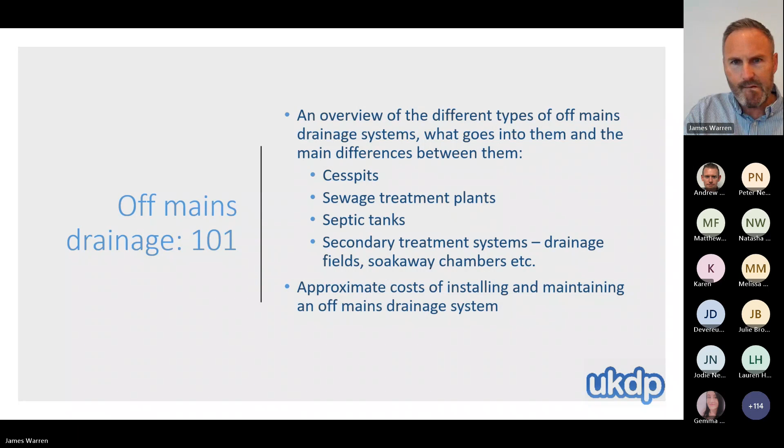Now, if the cesspit is sized appropriately for the property it serves, it should need emptying between 6 and 8 times a year. Now, if this is an old-fashioned, say 40 years plus old system, it will be built of brick or block work, and the customer will only know it needs emptying when something quite dramatic happens, such as the property's facilities start to work a little bit slower than usual, or there might be some nasty odours coming out, or indeed it might be overspilling in the garden.

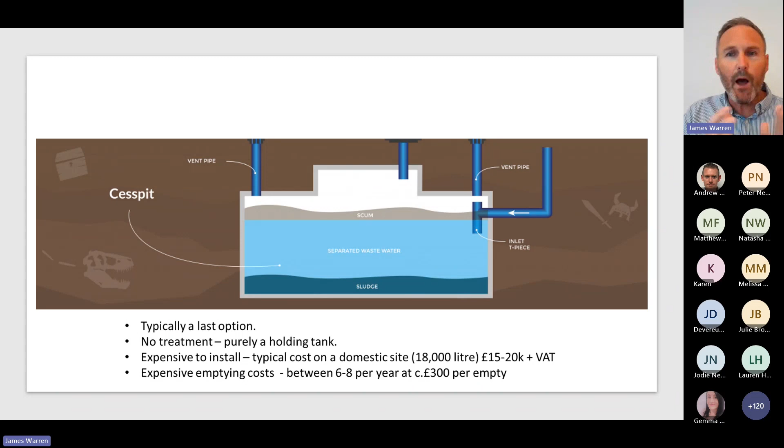And what I mean by that is the dense waste will naturally fall to the bottom, and it's referred to as a sludge layer. I don't know why it's called that, but it's pretty gross, but that is what it's called. And on the flip side of that, the fat, oil and grease and any matter that floats will go to the top, and that will form a scum layer. And what we have in the middle is effectively just the separated dirty water, but that has also got a label, and no one will ever drink again after this because it's called clarified liquor. I know, I don't know why, but that's what it's called.

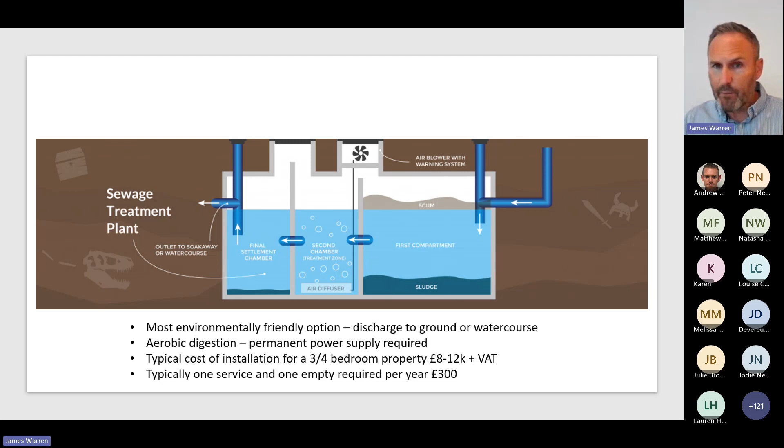But still, the absolute majority of off-mains drainage systems in the UK will still be septic tanks. I'm going to spend just a little bit of time on them, if I may, purely because the majority of what we'll see during our transactions or the building surveyors see on site will still be septic tanks. Originally built of brick and block, and from the 60s onwards, it's glass reinforced plastic, like a fiberglass material. But I'm going to talk you through the different types, if I may.

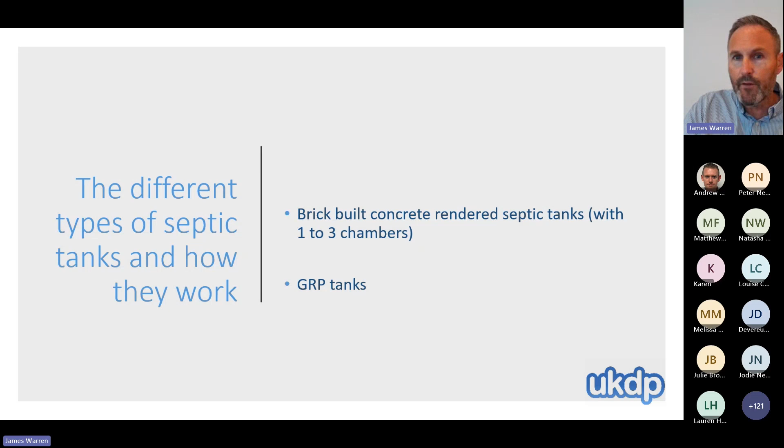Now, without being too boring, and I'm probably already guilty of that, for which I apologise, any manhole should be a dimension of 450 by 600 mil, and the 600 mil being the length should dictate the direction of the pipework within that manhole. So if you're looking at the length of a manhole, when you lift the cover, that should be the direction the pipe is going.

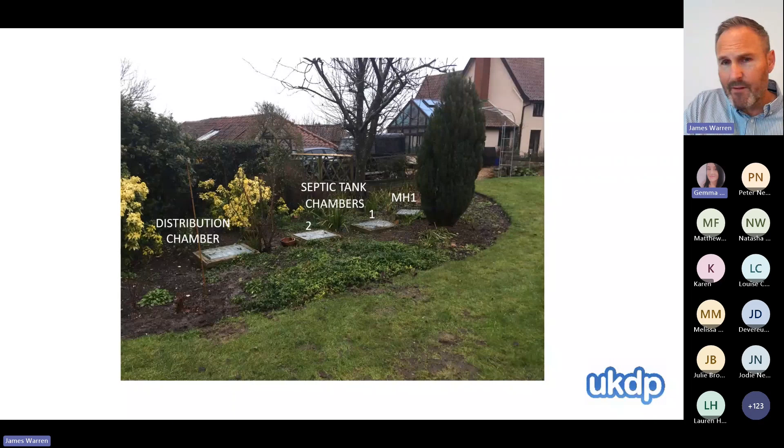And I did notice a question there. I'm sorry, is there a question there, Gemma? No, I don't think so. Oh, I just saw a hand up. Not yet. I do apologise. Oh, no, I don't think so, unless I've missed that. So I'm just making sure everyone's awake. I'll carry on. I'll double check and come back on if there is.

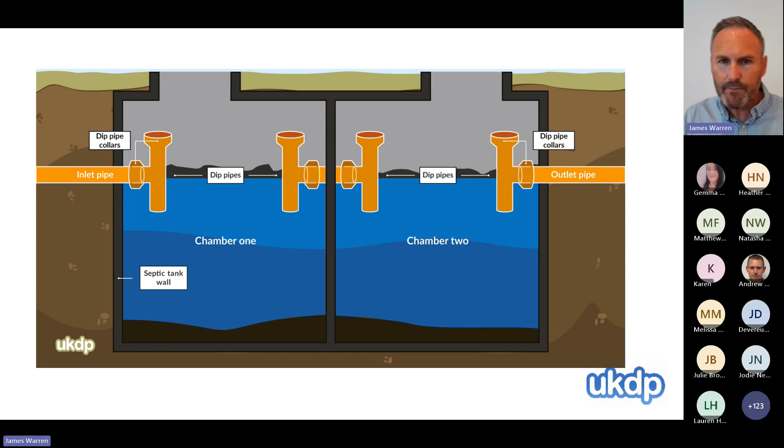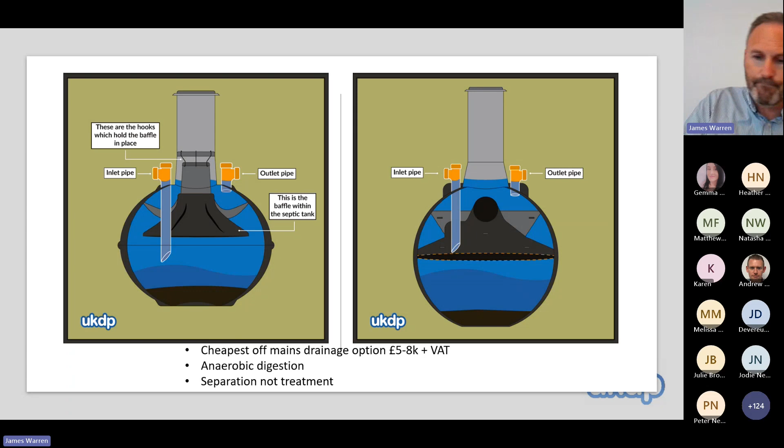The problem we have, and this is why it's really important that we speak to surveyors about this, because even though they're only there to have a quick look when they're doing a general building survey, they might actually be able to pick up that there is a problem in their visit. I appreciate they'll be looking at a myriad of different things during their visit, but if they notice an off-mains drainage system, they might also notice there's an issue there and then.

They don't last forever. Manufacturers normally give them a 20-year lifetime guarantee. In reality, they're probably going to last 40 or 50, but they're not going to last forever. So at some point they'll need repairing or replacing, and there's a myriad of reasons why they may fail. It could be a structural deficiency. If they're in a driveway, they could have been driven over and that's caused a problem. They could have deteriorated over time, could have been put in the ground incorrectly, all these reasons.

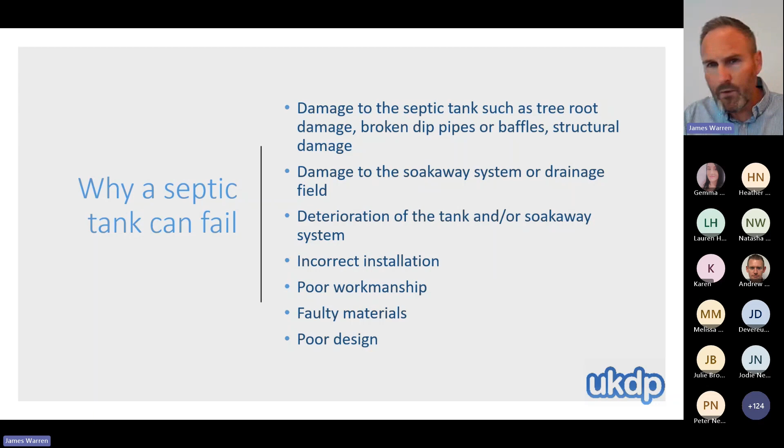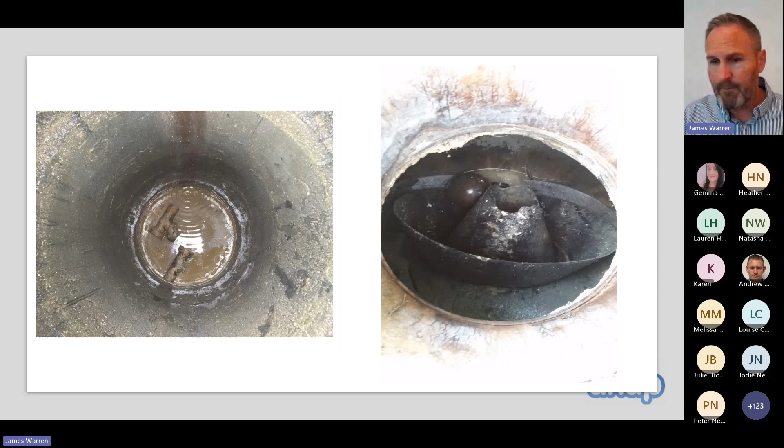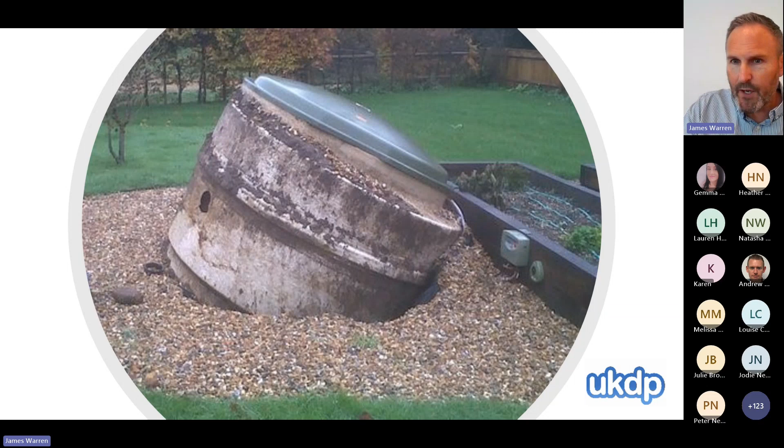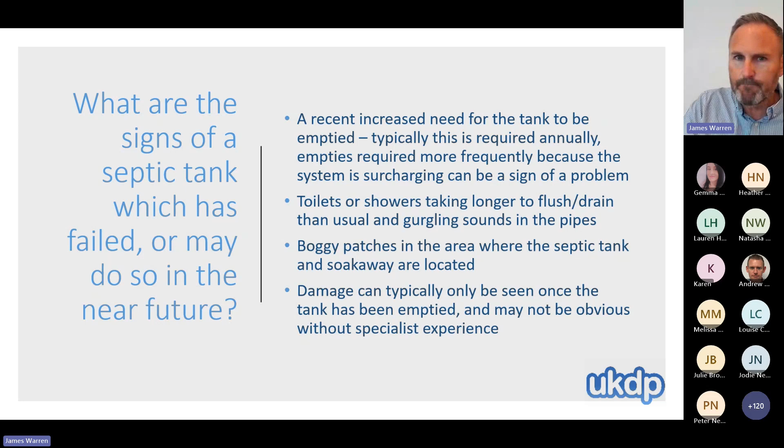I leave this slide in just in case you are as excited or sad as Gemma. Choose which one you want.

And then when it's empty, we'll go in with the camera and we do 3 videos: one horizontal, one tilted down and one tilted up. Between the 3 videos, we've got a complete picture of that asset. We'll be able to highlight any structural issues. We'll be able to take the measurements to make sure that it is appropriately sized for the property. And also it provides technically an audit trail to back up whatever we say as to what that asset is, how big it is, its condition, and is it legal.

Hi, James. I'll just interrupt. Please do. So we've got a question from Anonymous. Hi, James. How would you get the ball type septic tank emptied? How would you get the sludge/heavy removed from the onion one? Thank you. Does that make sense? Yeah, it does. Did I read it properly? Absolutely.

No, it's fine. So this is why it's so important that the engineers on behalf of the emptying companies know what they're looking at. Every system will need a slightly different process for the emptying to be safe. In a scenario where it's the ball septic tank, the liquid level should be quite high. So they should gently take that first to lower the level. And then with the end of the emptying hose, gently nudge that ball out of the way to get the liquid underneath it. If it's an engineer that's busy or they haven't been taught correctly, they could just put the tanker hose in really heavy.

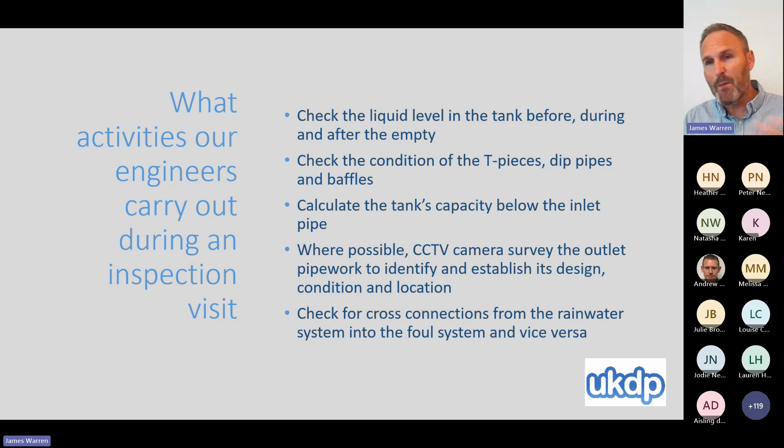Okay. This slide is in there because you guys might be doing it if you come out, you lucky people. But part of the process, whether it's us or any other company similar to us, they want to check that the tank or treatment plant is at its operating level, which tells us straight away that it should be working. If the level is too high, that's an indicator the soakaway isn't working. If the level is too low and it's not reaching the height of the outlet pipe, that's normally a sign that there's some sort of structural breach allowing the contents to escape into the substrata around the tank itself. Do a camera inside the tank to check the structural condition.

You then do a CCTV camera survey in the pipework leading away from the tank and back to the property to make sure that the pipework is not allowing groundwater to come in or out. And also we do rainwater cross connection checks, because no off mains drainage system should have any rainwater connected whatsoever. In a cesspit, it means it will fill artificially quickly, so the costs will get really high really fast because it'll be emptied more frequently than necessary.

In a septic tank, it will push through the contents of the septic tank before the separation process has occurred correctly, which means you're getting naughties being pushed out of the tank, which will start to make the soakaway fail. And in a sewage treatment plant, if you've got water coming through, again, there won't be sufficient time for the middle zone where the treatment process occurs to work thoroughly, so you'll get too many suspended solids and naughty matter that should be retained being pushed out. And more times than not, that sewage treatment plant will be going to a watercourse, which means it will be polluting.

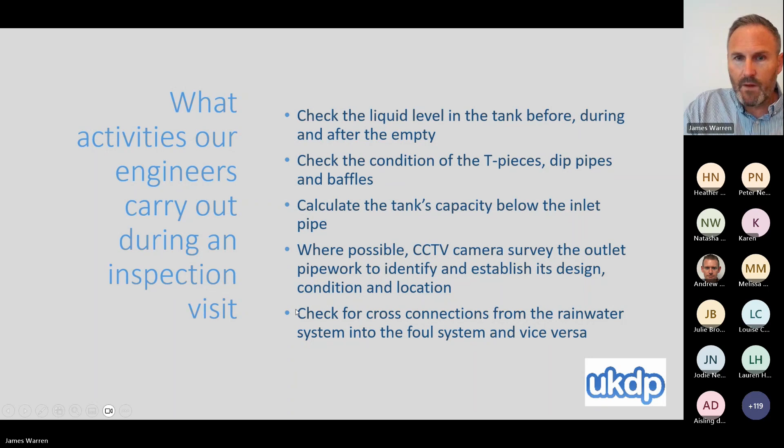This one hopefully will strike a chord with your good selves, the regulations around these off-mains drainage systems. I look at these every day, so I am the saddest person on the planet. Building Regulations 2010 Part H Section 2 specifically covers off-mains drainage systems. There is a 46-page document called BS 6297, which covers drainage fields, which are the only allowable soakaway arrangement these days. There is the British Water Flows and Loads document, currently on number 4, which talks about how to size these tanks, whether residential or light industrial.

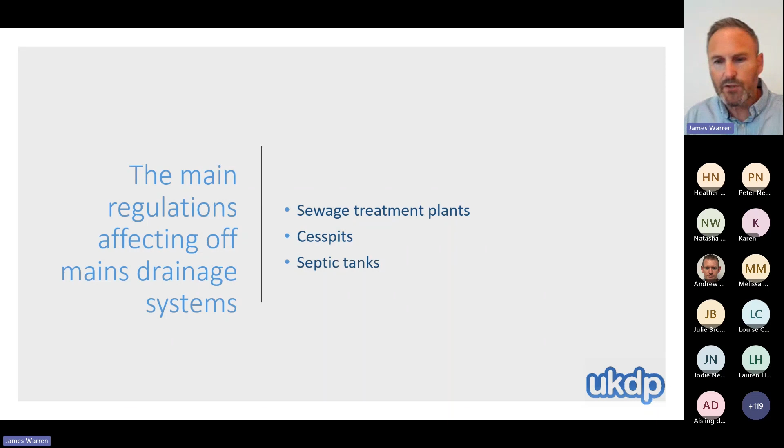Specifically, the English 2015 General Binding Rules. DEFRA introduced this regulatory reform on the 1st of January 2015. I use the word police, but it's overarching regulated by the Environment Agency in England. And it was devised and introduced predominantly to attack all the septic tanks that were discharging to watercourses. Now, there is no database in England for where off-mains drainage systems are. The only time that an off-mains drainage system is on the radar of the Environment Agency is if they've needed permission.

So if they've formally requested a consent to discharge, it goes through the permitting team at the Environment Agency. They come back and say yes or no. That will be on their radar, because then they might decide to come and do some proactive checks. But the general binding rules were for the septic tanks that were discharging where no one knew where they were.

So unfortunately, it was actually immensely difficult to get this message out there. And the fact we're still talking about it now, some nearly 9 years later, says that we've probably only scratched the surface of assessing and then addressing these non-compliant discharges. So effectively, when this was first released, there was a 5-year, 60-month time frame where it was believed in 2015 that should be sufficient time to find all these non-compliant discharges and put them right.

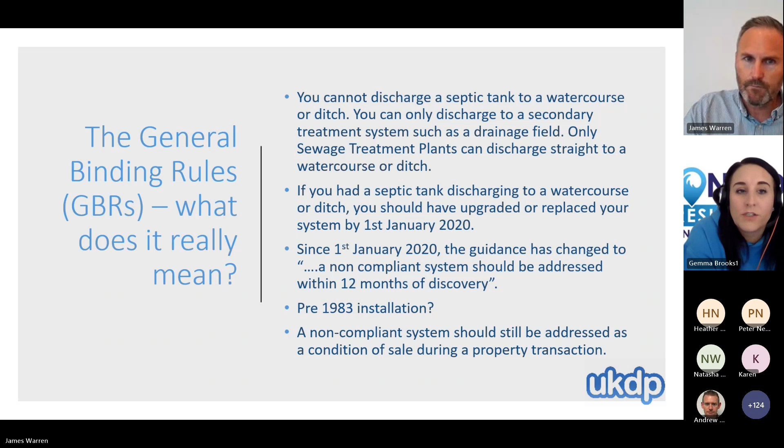I've just got another question, please. Good. Can you please comment on whether there are specific considerations where you have more than one property using the same facility?

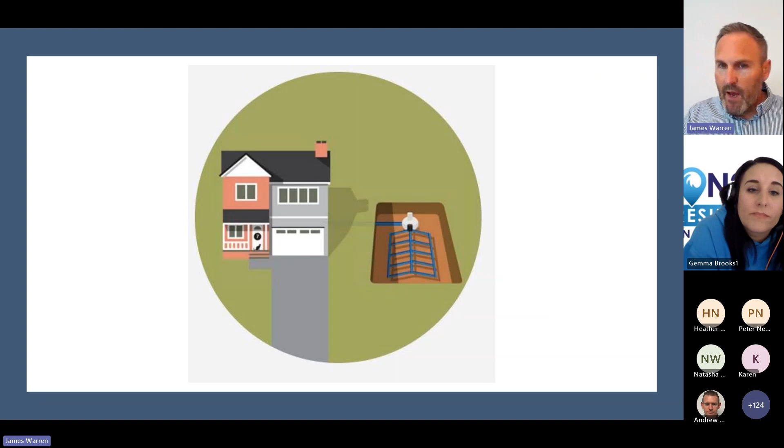Considerations. Yes. So for any shared scenario, if we use a cesspit or a septic tank as a first example, irrespective of how many properties are using it, I always urge the customers, if there is nothing written into the deeds, to come up with an agreement. Not necessarily going to an external management company to get something super formal drawn up, but something between them to say who is paying for what, who is going to arrange the empty, and it just helps when the properties are sold that the agreement is already in place.

With a sewage treatment plant, it needs to be formal because in addition to the emptying, you're looking at the annual service cost, and 99 point something percent of sewage treatment plants all need a permanent power supply. So whether that is an individual metered power supply that all the owners have signed up to for an individual agreement, or whether someone in a communal system is paying and asking for X pounds back from each of the neighbours, that needs to be a formal agreement.

And where there isn't one in place, we find all sorts of issues, such as little Mrs. Smith against a family of 6. She's arguing why should she pay half the emptying when they're using it a lot more. It's a decent argument, but it doesn't work like that. If you've got 2 properties, it's 50% each, unless the deed stipulates something different. So absolutely, it's so important an agreement is made for their protection while they're in ownership and for the new owners in the scenario of a property transaction. Absolutely critical.

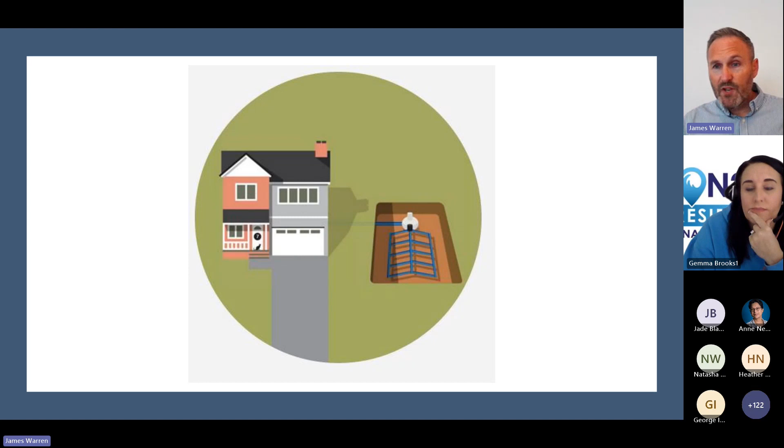Or Jenny can write it and I can talk about this side and we'll come back to that one. Yeah, at the end, we'll come back to the other questions because we've got quite a few filtering through now. Brilliant. Okay, perfect. I'll come back to you in a minute. Thank you. Awesome.

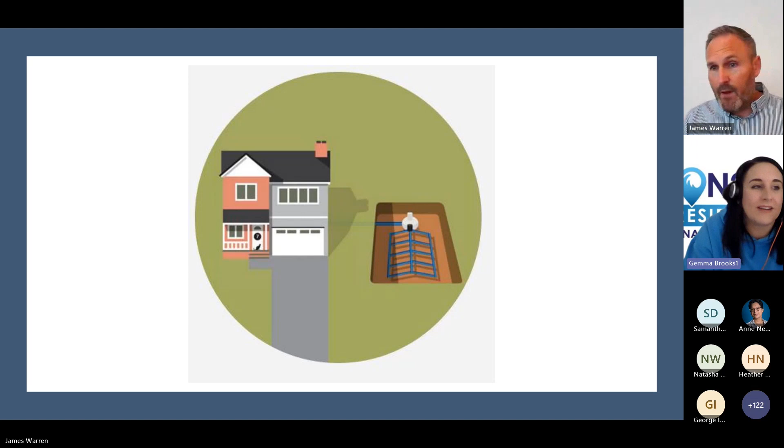So in England specifically, where the general binding rules are in place, any new septic tank that has been installed in England after January 2015 has to look like this image now.

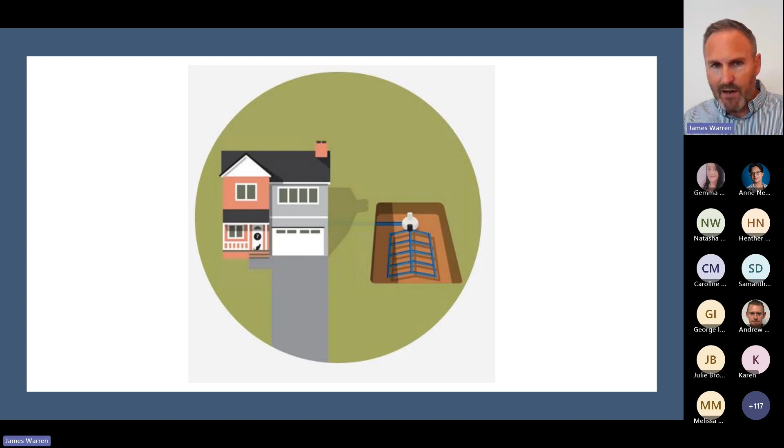Don't worry about the cat on the doorstep. That's not relevant, but for some reason we always have cats in our pictures. Don't ask me why.

What we're looking at there, the white onion tank is the septic tank. The black box in front of it is called a distribution chamber, which is where the pipework for the drainage field, which is the blue pipework, is able to be accessed. You lift the cover of the sample chamber, the distribution chamber, and you can see that everything is flowing nicely. The drainage field is the only compliant legal soakaway arrangement from January 2015 in England. A drainage field is a series of perforated or slotted pipework.

They're typically 4-inch diameter, and they're laid in the ground almost flat. So the gradient is 1 in 200. So every 200-meter length, it only needs to drop a meter. And the reason it's designed that flat is specifically so the water going through the pipework is going through immensely slowly. That is because these slots or perforations at the bottom of this pipework allow the water to go through, and the bedding of the pipe and the substrata under that is where the treatment occurs after a septic tank.

And effectively, as it goes so slowly, over maybe 30, 40, 50 years, those holes and the substrata underneath it will fail in sequence. So it's just designed to fail slowly or work efficiently, whichever way you wish to call it. But a septic tank can only now discharge, after 2015 in England, to a drainage field soakaway. If a septic tank is discharging to anything other than that, and it's been installed after 2015, there will need to be a permit to discharge from the EA against that system, otherwise it is a non-compliant system. So it's so important that the owners keep their associated paperwork to prove or disprove what the system is.

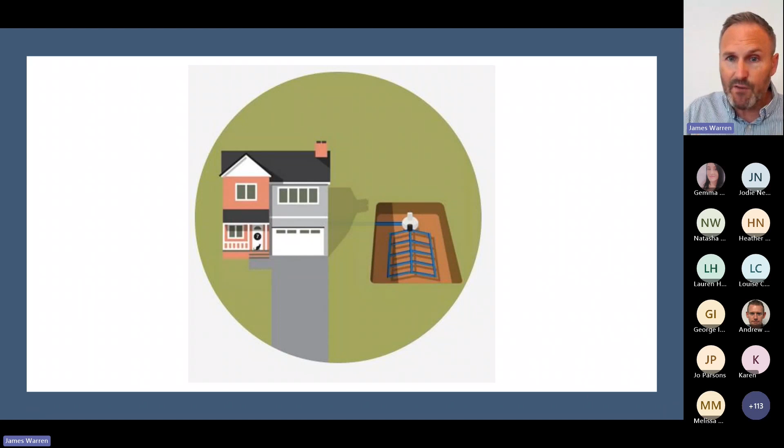So you look at a big garden, you think, oh, irrespective of the percolation test results, we must have enough room. But if it's a big drainage field and then you introduce all these different parameters and characteristics, there might not be enough room. If you haven't got enough room for a drainage field, you can't have a septic tank. By default, you're then looking at a sewage treatment plant, which gives different options for where it can legally discharge. So that percolation test is critical. And I know that's a bit techie and I apologize, but it is important.

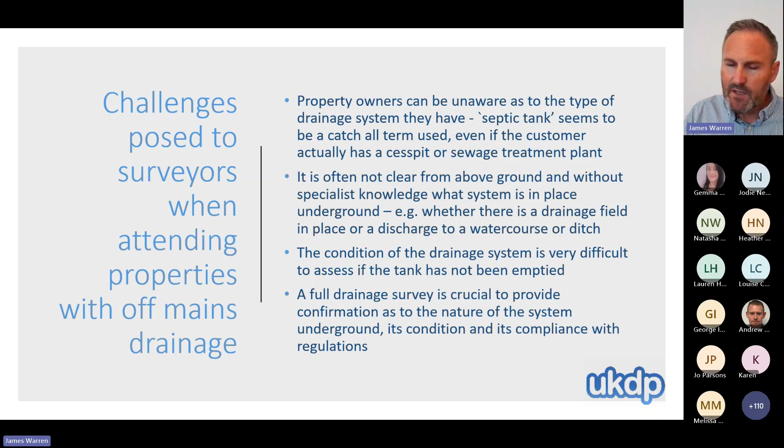Challenges posed. This is a building surveyor, an insurance claim surveyor, a drainage surveyor, one of my surveyors. It doesn't matter. Any surveyor going out doesn't know if the customer knows what they've got, so it's imperative we check. You can sometimes get an indicator above ground of what the system might be, but again, you typically need to get it emptied to have a look. You need the camera equipment to ascertain if it's going to a ditch or a soakaway arrangement or some discharge to ground. You can only check the structural condition and check the capacity to make sure it's adequately sized once it's emptied, so you can get the measuring equipment in the tank. And again, not a sales pitch, but it is imperative to get a full survey to create the evidence for all of our stakeholders in a property transaction to make sure that system is compliant and legal.